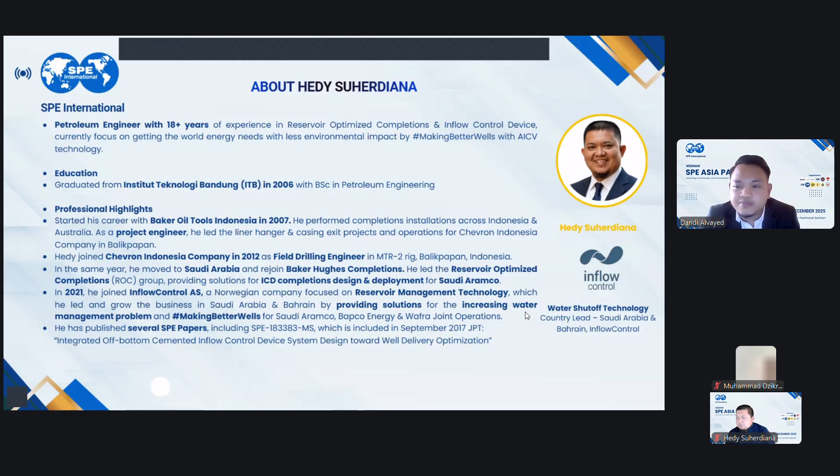Above that, he is a great author. He has published several SPE papers. One of the highlights is SPE 183383-MS, which was included in September 2017 JPT, called Integrated Off-bottom Cemented Inflow Control Device System Design Toward Well Delivery Optimization. So, without further ado, let's have a chit chat with Mr. Hedy.

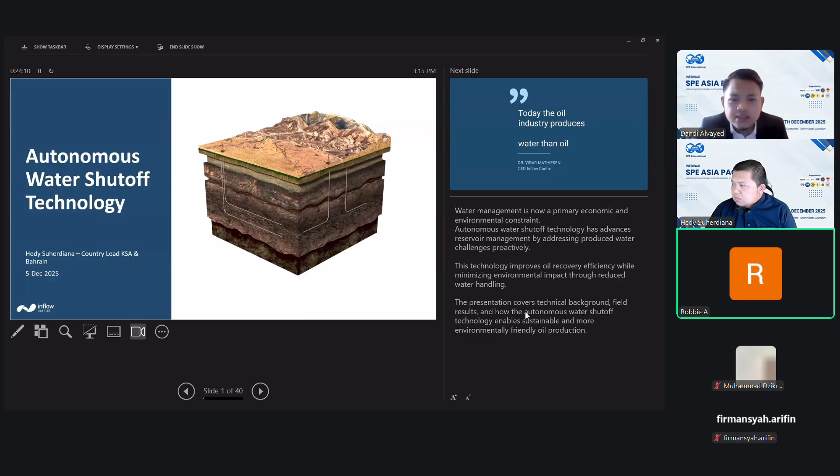Sorry, Hedy, I think this is the wrong screen, yeah? Are you sharing the right screen? Yes, yes. Oh yeah. Thank you, Robbie. I guess I shared the wrong screen. All right.

Right. So water management is now a primary economic and environmental constraint in oil production. Autonomous water shut-off technology has advanced reservoir management by addressing produced water challenges proactively. This technology improves oil recovery efficiency while minimizing environmental impact through reduced water handling. My presentation today will cover the technical background, the field results of the autonomous water shut-off technology, and how it enables sustainable and more environmentally friendly oil production.

Today, the oil industry produces 10 times more water than oil. Some wells are producing with water cut around 99%, meaning that for every barrel of oil, they're producing 100 barrels of water. This is crazy. Most wells will need an ESP pump to pump up the water, maybe from 2,000 meters downhole. You use a lot of electricity, meaning a lot of CO2 emissions. Similar with the gas, it has to be flared. You have big systems for handling the water, handling the gas, separation, transport. A lot of investment, a lot of operation costs, not required.

It is possible to stop the water and the gas downhole. Today, we have the technology to do it. This is important, both for changing the oil industry to be more modern, but it will also be important for the world. We need energy, we need oil, and we need it in an environmentally friendly way.

Okay. So that was our CEO, Dr. Vidar Mathisen. He was the founder and the inventor of the autonomous inflow control valve, or AICV. As he mentioned, 10 times more water is produced when we try to produce 1 barrel of oil. This means we have opportunities that we can fix. The first one is we can reduce the OPEX per barrel of oil per day that we produce.

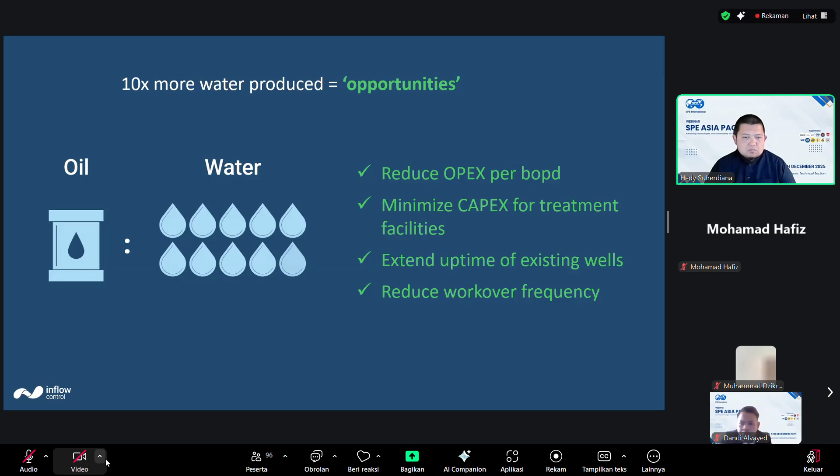Before we go into the technical aspect of the water shut-off technology, we will discuss the reservoir dynamics in horizontal wells, because this is where the water shut-off technology takes place. So why are we drilling a horizontal oil well? Drilling a horizontal oil well provides larger and more efficient drainage compared to vertical wells. So we can access more of the reservoir and maximize oil extraction.

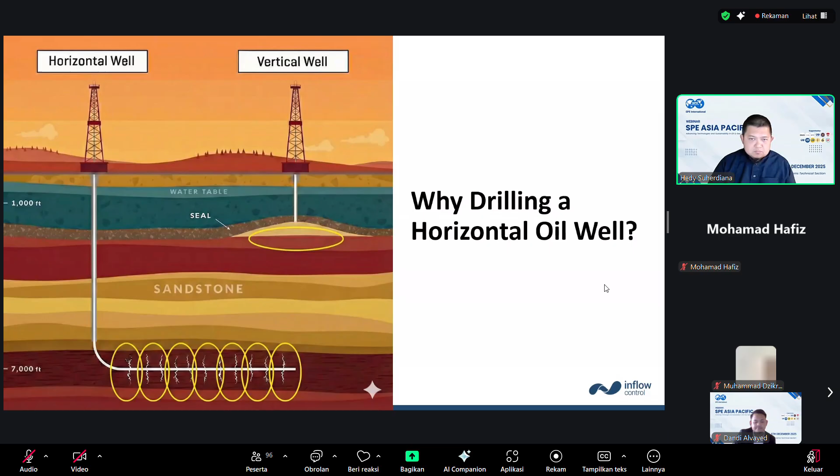However, the horizontal well has several production challenges. The first one is the reservoir heterogeneity. In both sandstones and carbonate reservoirs, there are variations in permeability along the wellbore. In carbonate formation, the natural fractures further enhance the permeability differences. So these variations cause uneven fluid flow, which can lead to inefficient oil recovery and increased water production.

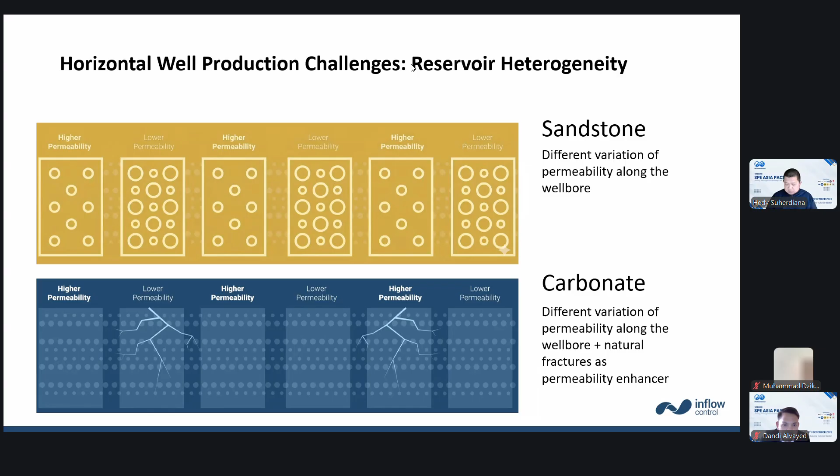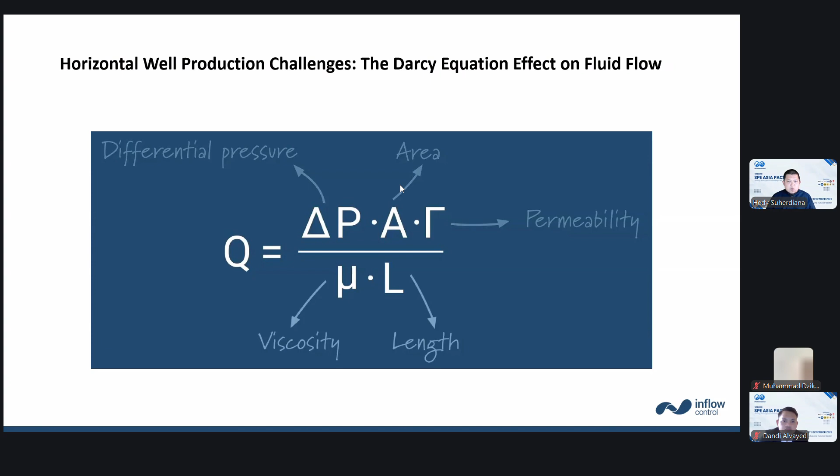We will talk more about the permeability and viscosity in this case, because this is where the autonomous water shut-off technology will help. So reservoir heterogeneity causes imbalanced fluid along the horizontal wells, which leads to uneven production of oil, water, and gas. Why? Because oil normally has higher viscosity compared to gas and water, which makes it harder to flow compared to water and gas. As a result, water and gas tend to flow easier through the high permeability zones, while oil flow is restricted.

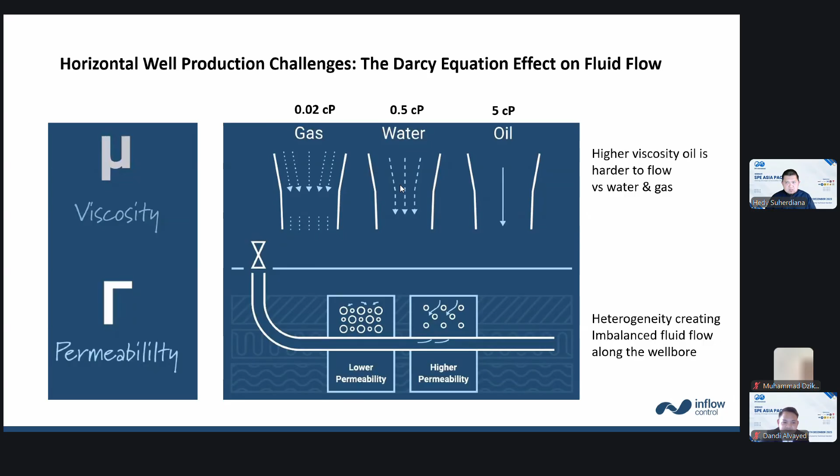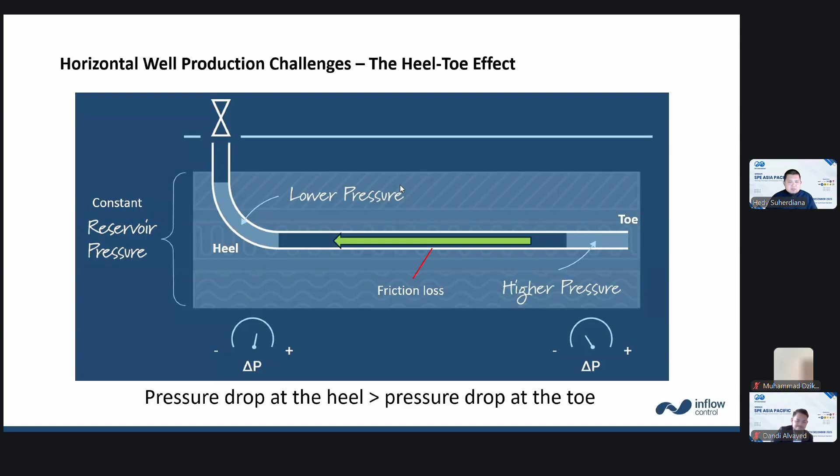Plus, the horizontal well will experience a heel-to-toe effect. So what is the heel-to-toe effect? It's when the pressure drop at the heel is higher compared to the pressure drop at the toe. So this imbalance is caused by the friction loss along the wellbore. So when the flow is coming from the toe to the heel, it will lose its pressure because of friction loss. And this will create more flow at the heel part of the well. So when you have more flow coming from the heel and less flow coming from the toe, water coning effect will be more likely to happen.

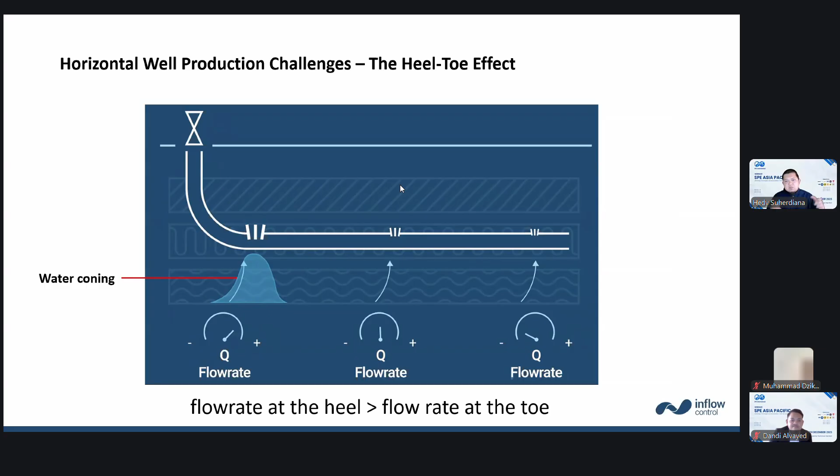Heterogeneity plus heel-to-toe effect equals non-uniform oil production. So in a horizontal well, from heel to toe, you will have non-uniform oil production, or the production will not be equal if you produce with open hole or standalone screen or whatever completion that is not using inflow control device.

So how will the autonomous inflow control valve help in this case? AICVs, or autonomous inflow control valves, will distribute the drawdown along the well. That means it will choke the place where it has a higher permeability, and it will give more way for flowing the oil at the lower permeability.

However, when water and gas start to enter the compartment, the AICV will create a choking effect and will create very high delta P, or higher pressure drop, and it will close the main valve. This also happens with gas. If gas is starting to enter, it will create a higher pressure drop in the compartment, which eventually will choke the compartment.

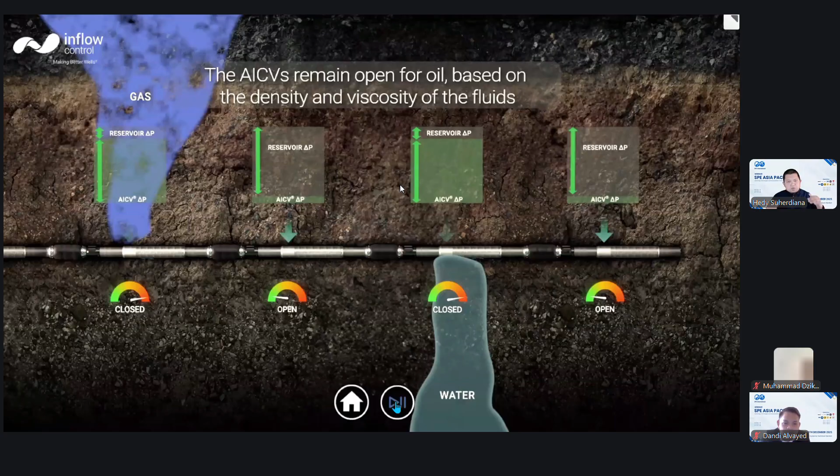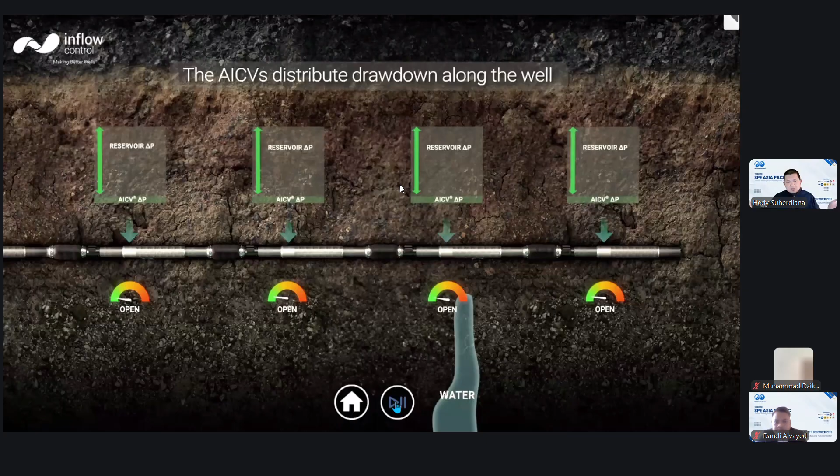And all the drawdown that is given to this well will be distributed to the zones that are still dry or still don't have water or gas. So we can produce more oil and we can increase the recovery factor of this well.

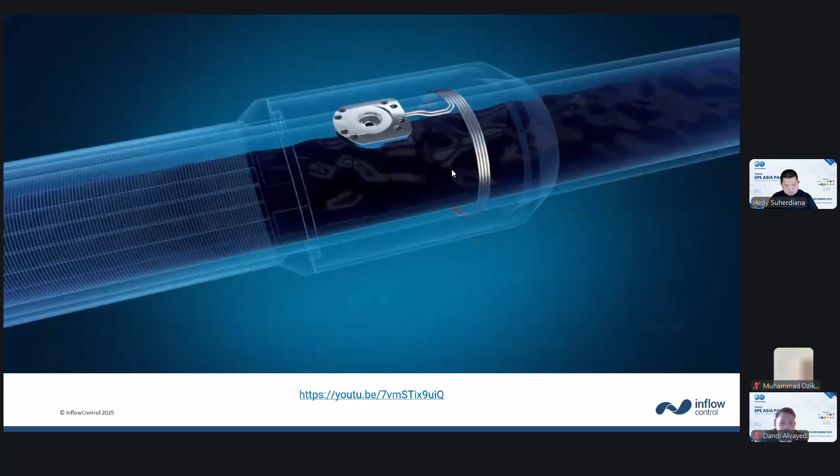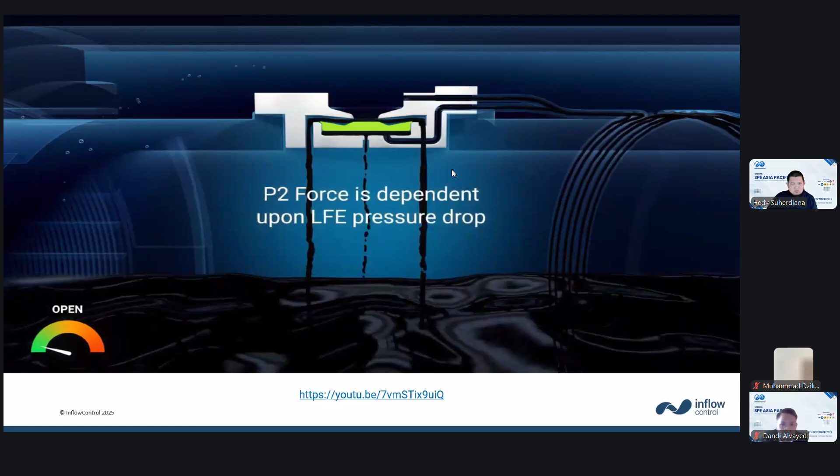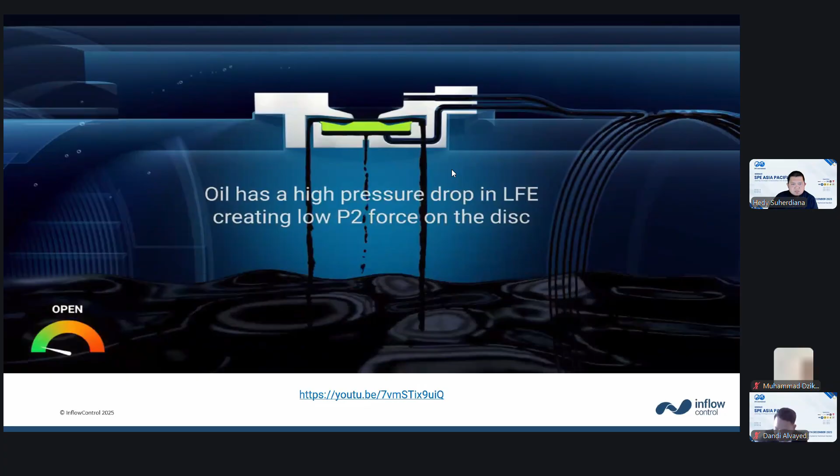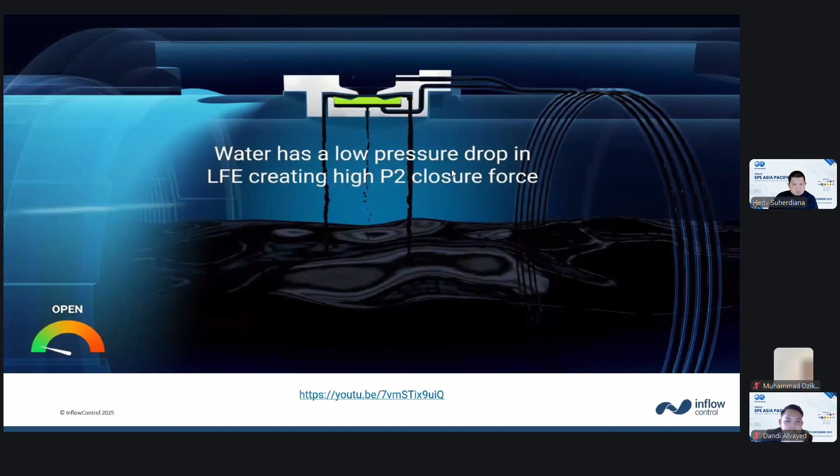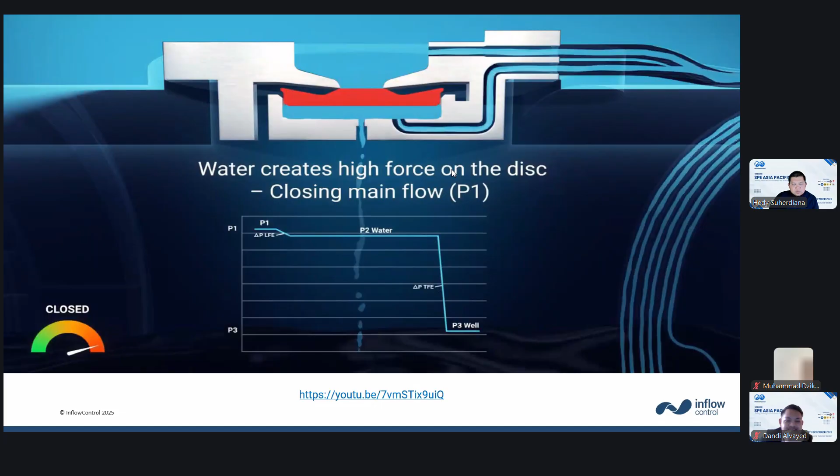There is another element here, different element. This will be useful if the oil and the water has a similar viscosity. When water started to flow, create a small pressure drop inside the LFE. So the P2 will be similar like P1, but because the force acting area is larger, close the main. And it's reversible. When it comes back, it will open again.

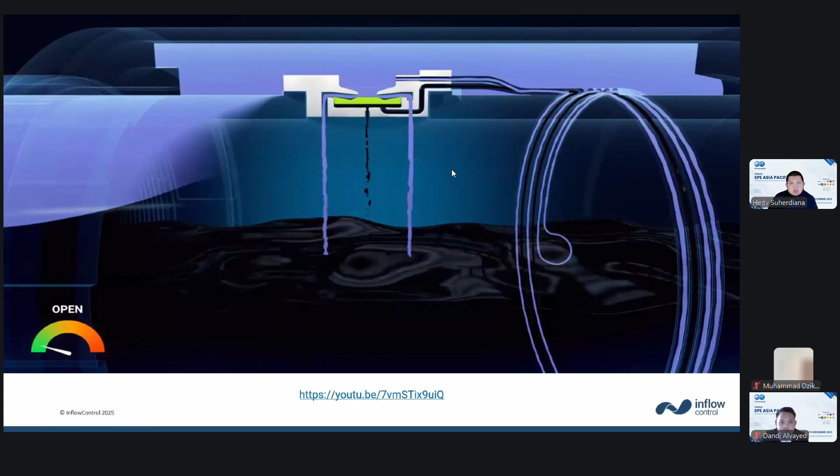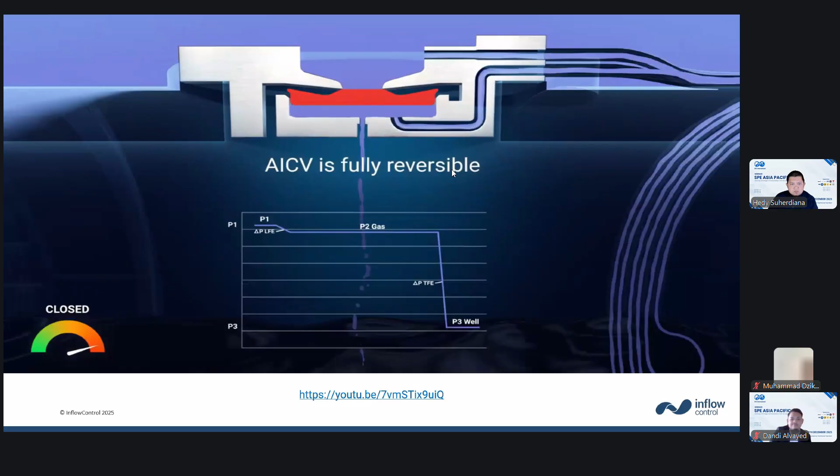Same thing happens. Gas comes into the AICV. Gas, which has a very low viscosity, with a very low pressure drop, it flows very well. And the AICV stops gas production. Okay, so that was the theory. What about the real thing?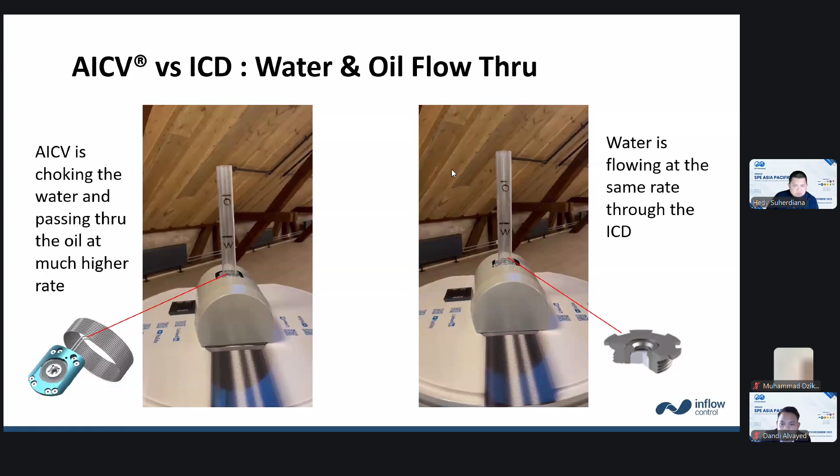And this is how the AICV is placed on the joint. And there are several different sizes from 2 7/8 to 7-inch. We also have the super slim, which is the 2 7/8 size that can be retrofitted inside an existing ICD completion, 4.5 or 5.5. So if you have an existing ICD completion that is already producing water, and you can expect there is still oil that is left behind, we can also put the AICV completion inside that ICD completion to produce the remaining oil that is left behind.

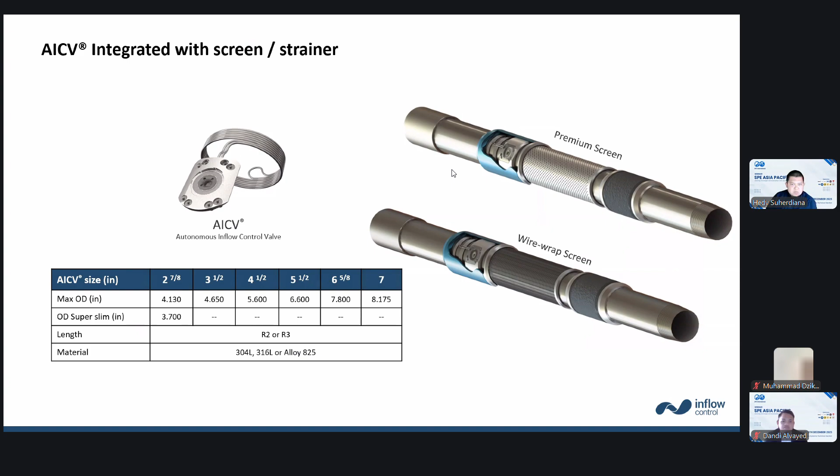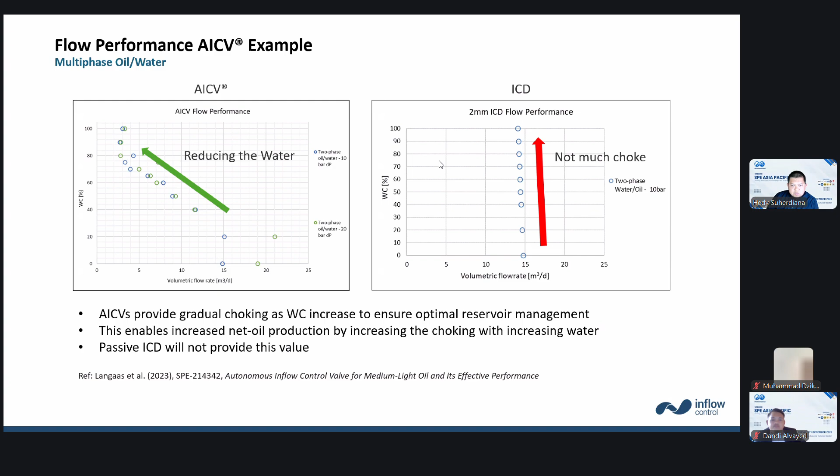And this one is the flow performance of the AICV in multi-phase of oil and water. So the AICV will start to choke the water at around 20% water cut. Gradually, the more water cut, the more choking effect you will have. And on the right side, you can see that the ICD is not choking that much. Also for the gas, the AICV will choke gradually when the gas volume fraction, or the GVF, is increasing, while the ICD will produce more gas.

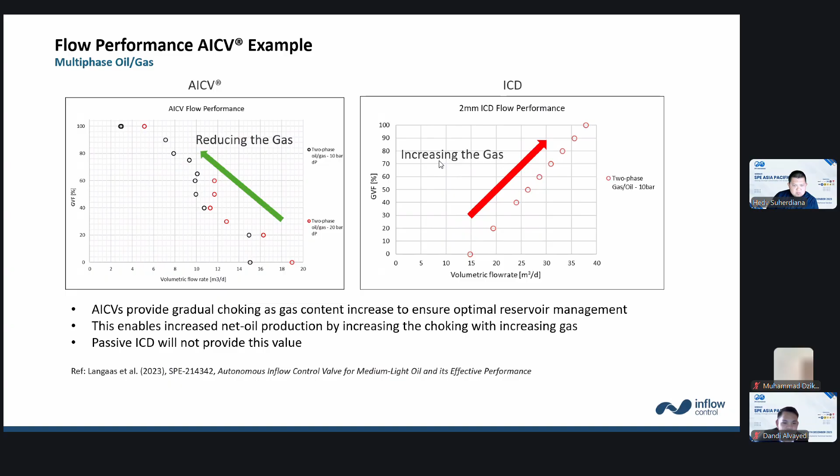So today we have various kinds of AICD, or autonomous inflow control device, on the market. And we have some studies to determine the performance by having this fluid performance ratio, or FPR. So what is FPR? FPR is a calculation to compare downhole inflow flow performance percentage. So in short, if you want to compare between one technology and the other, you can use this kind of calculation. It's a simple calculation. You just need to know the flow performance chart of each technology that you have. Then you can compare.

For example, this is an AICV flow performance chart where on the y-axis you have the differential pressure, on the x-axis you have the flow rate. All the inflow control performance charts will have the gas, water, and oil flow chart. In this case, if we produce at 150 psi differential pressure, when you have 100% gas, the AICV will flow around 22 barrels per day, reservoir barrels per day.

And if it is producing water, it will produce around 30 reservoir barrels per day. If it's producing 100% oil, it will produce around 74 barrels per day. So what is the water reduction or the performance ratio of water in this case? It is the water flow rate divided by the oil flow rate, which is 30 divided by 74, equals about 0.4. So the water reduction is around 60%.

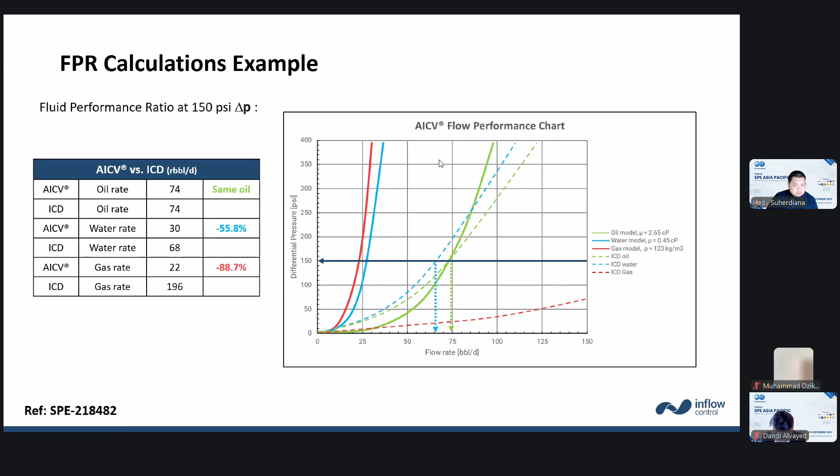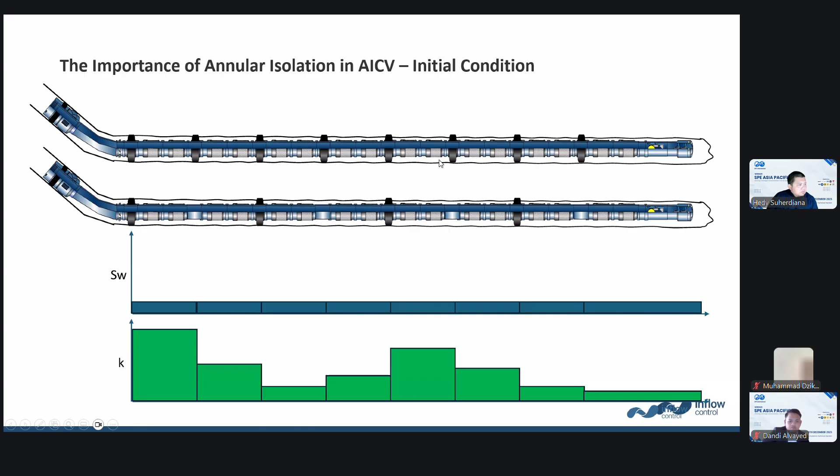So as a comparison, if we have 1, 2, 3, 4, 5, 6, 7, 8 compartments here, compared to 4 compartments here, what will happen if we start producing water? So in this case, the initial condition, everything is still oil. But if we start producing water, in a completion where you have more compartments, the water will be isolated, and you will still be able to produce oil from the dry compartments.

However, with the last completion, even the area that is producing oil will start to choke because this annulus is not isolated and it's just acting like a highway. So water will enter also into this compartment, and the AICV will start to choke. So you will leave the well producing from half of the reservoir.

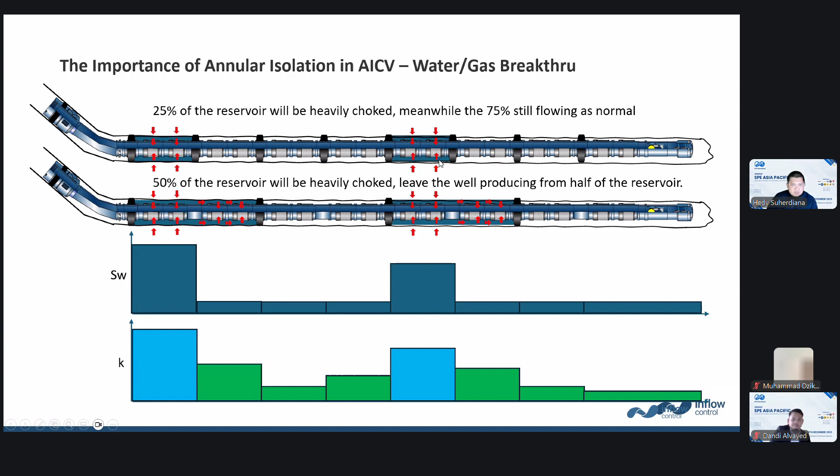Right. So what have we done globally for the AICV? So we have several case studies showing how AICV can help us to make better wells.

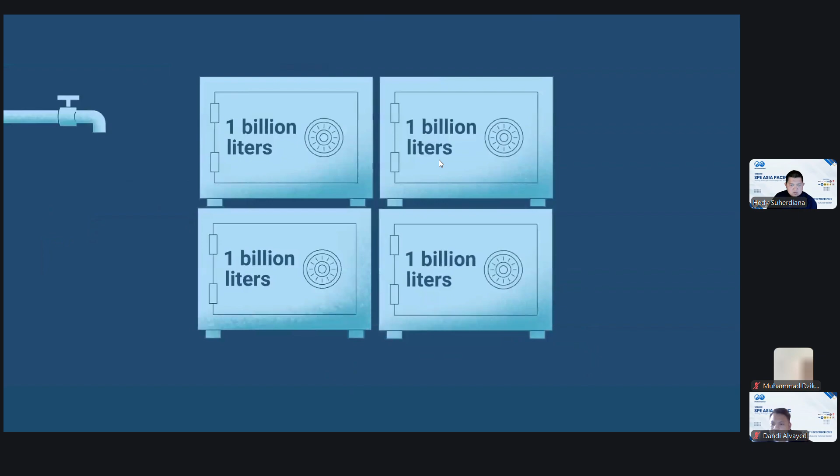What if water wasn't the oil industry's largest product? With AICV technology, 4 billion litres of water was saved from production in 2020. That's 4 billion litres of water not extracted from the earth. 4 billion litres not needing chemical treatment. Not transported and discharged back into the environment. These are the results that matter, not only for the oil and gas industry, but for the world.

Okay, the first case study is that we have deployed this technology in the Middle East, and the reservoir is carbonate formation with light oil, 1.8 centipoise. Initially this well was shut down because of a high water cut. So we retrofitted the AICV inside an 8.5-inch open hole with 5.5-inch AICV joints. And for the result, the water production reduced up to 66%. And then we have some savings for the operator, and we allowed a prolonged oil production plateau for this well. So we increased the lifetime of this well.

We reduced this much water, and reduced this much CO2 per year, and this is a similar effect to removing about 47,000 cars per year from the road.

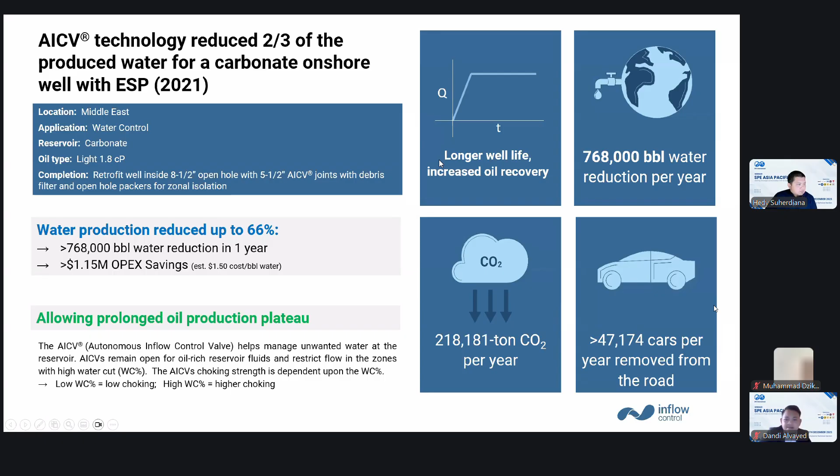The next case study is in 2023, also from the Middle East. Similar type of oil. So this well was producing about 90% water cut, and then it was shut in, and then it was revived when we deployed the AICV. So it was initially producing, but then the water cut came up very high. Then we retrofitted the AICV to this well, and we reduced the water cut to 50%, and we tripled the oil production. So this is the amount of water that is reduced per year, CO2, and also the cars that can be removed.

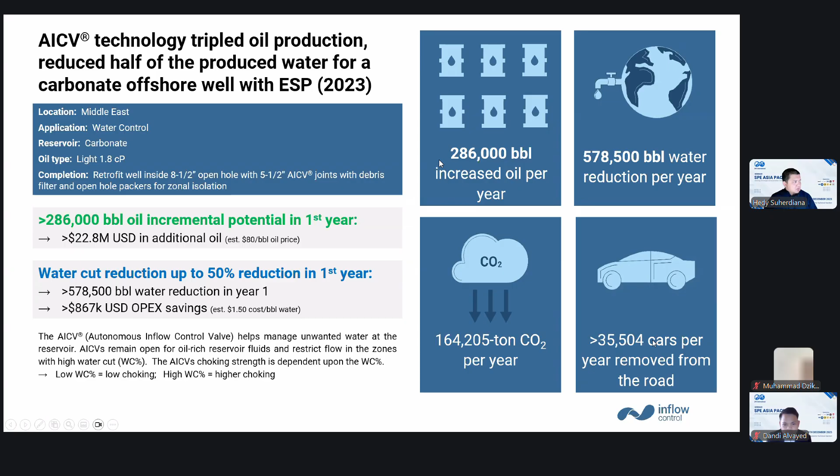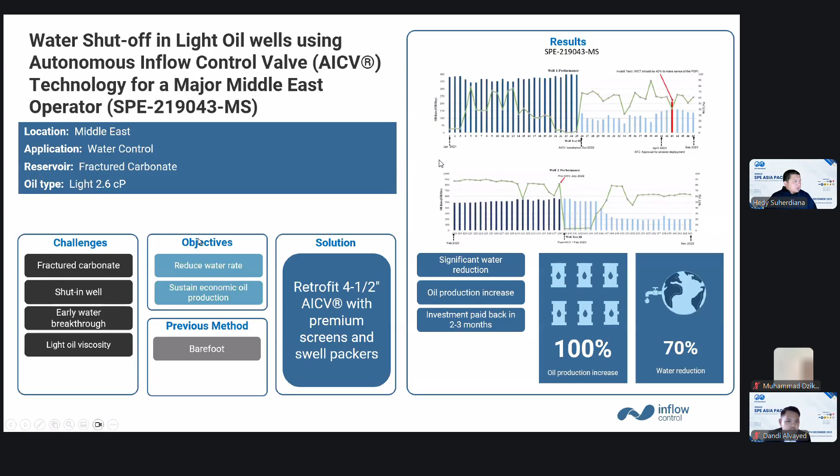Another case is in the Middle East for fractured carbonate with 2.6 centipoise. We have two wells here, both shut in due to very high water cut - almost higher than 90% for one well, and about 60% for the other. On the first well, we revived production after deploying the AICV and suppressed the water cut to around 30%. For the other well, we also revived production and suppressed the water cut. This was a light oil application.

So AICV can work from ultralight oil to heavy oil applications. We have a high range of application.

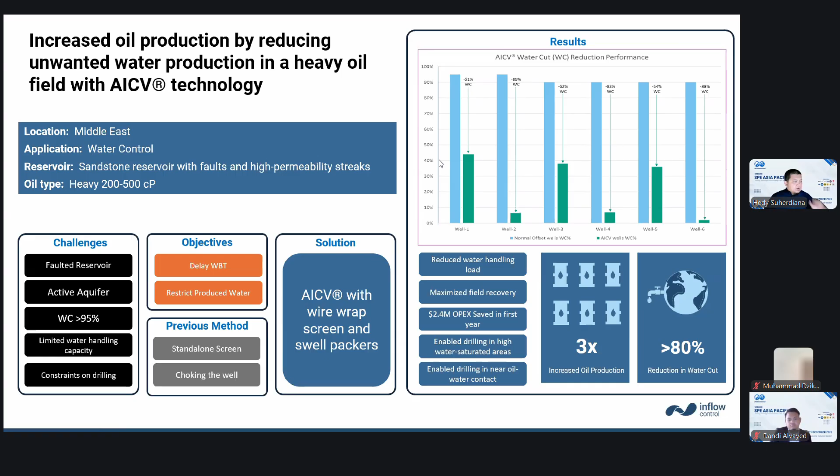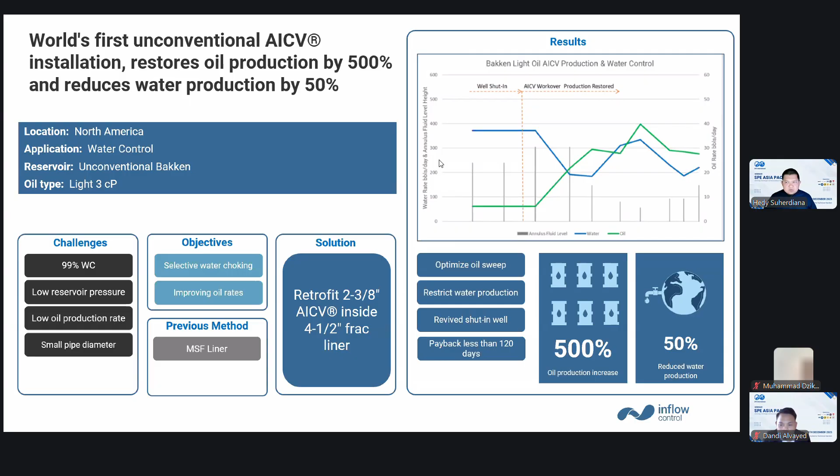So the AICV is not only helping us reduce water production - we can also help operators reduce unwanted gas production.

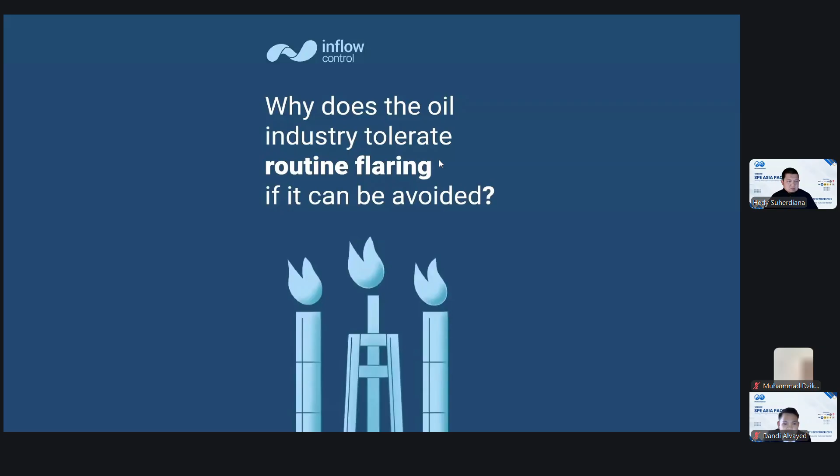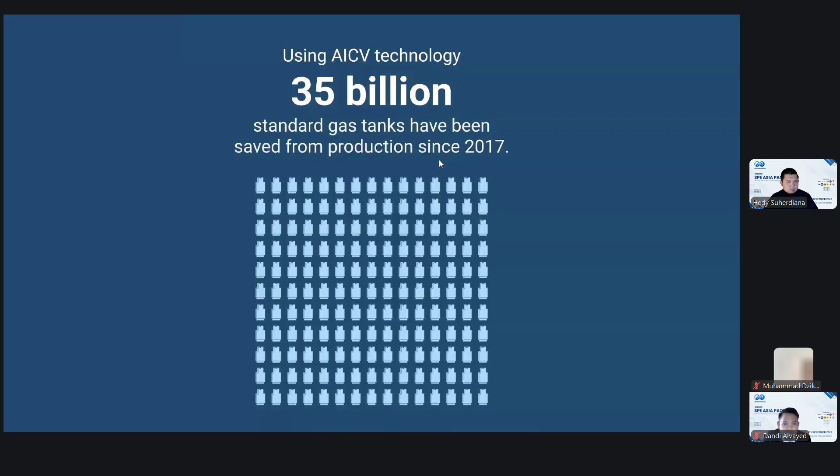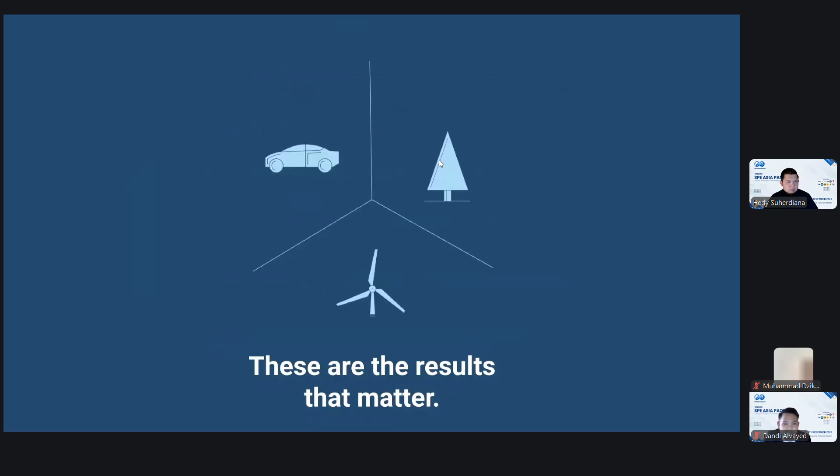Why does the oil industry tolerate routine flaring if it can be avoided? Using AICV technology, 35 billion standard gas tanks have been saved - the same as taking passenger vehicles off the road for one year, the same as 119 wind turbines running for a year, the same as 2,907 square kilometers of carbon sequestering forest, an area 27 times larger than the city of Paris. These are the results that matter, not only for the oil and gas industry, but for the world.